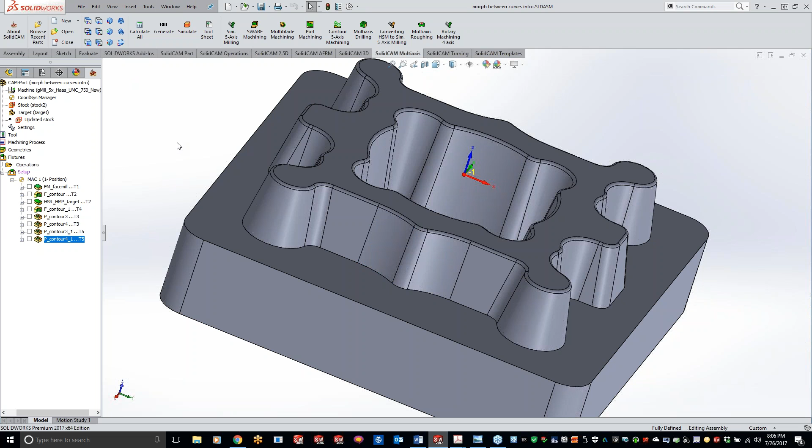Identical to HSS, morph between boundary curves. Next week we're going to cover sort of the same thing, instead of morph between boundary curves it's going to be morph between adjacent surfaces, which gives you a lot of the same results. It's completely up to you guys on what you want to use between morph between boundary curves and adjacent surfaces. I'll show you both, and hopefully that will help you when you come across a part on what you should choose for a toolpath.

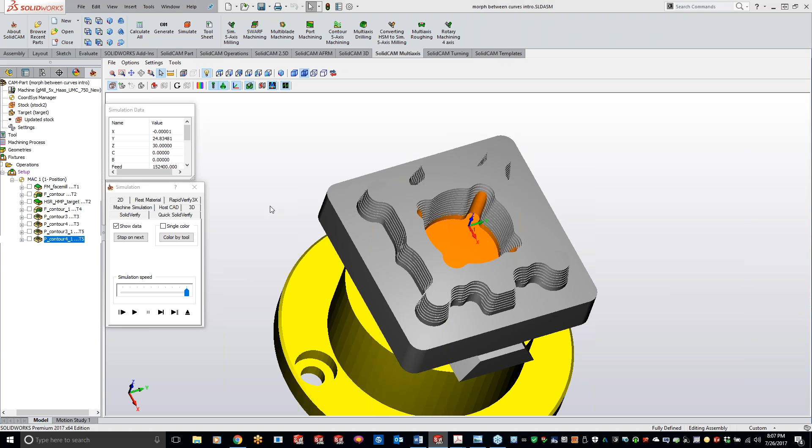If we take a top-down view here, you can see our walls are tapered, tapered on both sides here and the outside. This part is pretty much roughed out right now. If we go do a simulate here, we'll just do a solid verify real quick. So this is kind of what we're looking at right now for what's inside that toolpath. Everything's roughed out. Could use 3D machine on this, but I just roughed it out using some different geometry, changed it up a little bit.

So now we want to do our 5-axis simultaneous in here. I want to keep that cutter basically cutting on the side of the cutter, working its way around, morphing between the top edge and the bottom edge, same thing for the outside. So start up here, and we'll do a simultaneous.

For those of you that are new, we covered a lot of this in the HSS, and like I said, the HSS and the simultaneous 5-axis are identical. You're not going to see anything different. The only thing different here is the tool axis control. If you're just running regular HSS, it's going to look like this. So when we do 5-axis, it just opens up that tab.

So let's start at the top and we'll work our way down. Our drive surface that we want to cut is this inside surface area here. So let me just go through and grab all these real quick. Okay, we got all our surfaces selected.

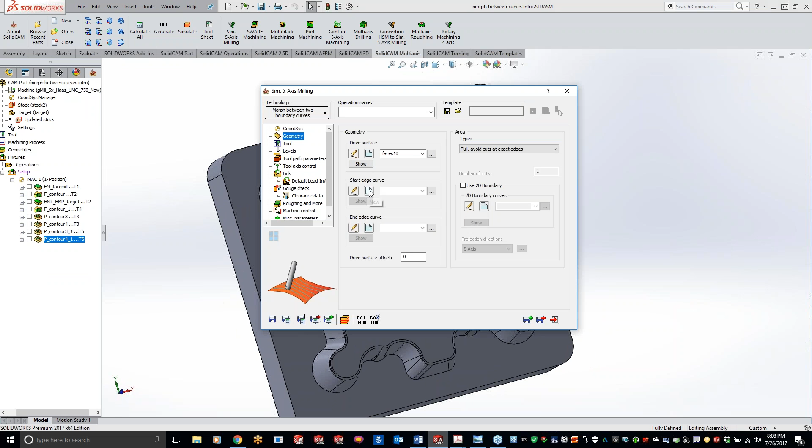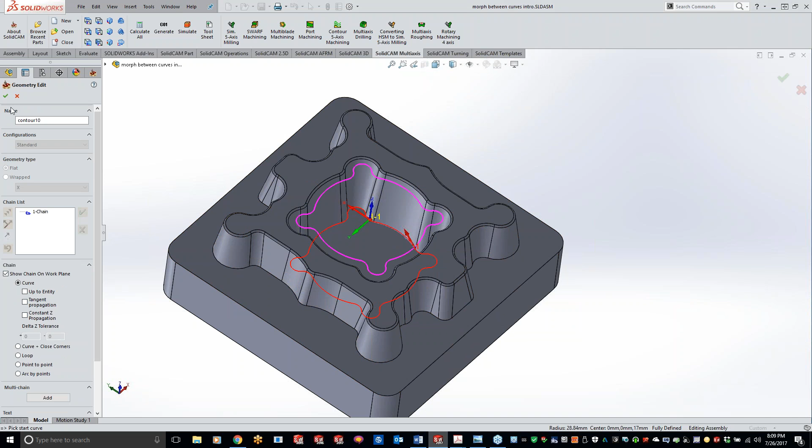Now at my start curve, I want to start at the top and work my way down to the bottom. So I'll chain that, and I'll just do the constant Z propagation here. It's not taking it, so we'll just go around here real quick. There we go. And we'll go ahead and grab our end edge curve. So where do we want the toolpath to end up at? So now we told it we want it to start up here and work our way down to the bottom.

So for this one, we'll do kind of a semi-finish, so we'll just do a 0.2 millimeter offset for right now. Let's go ahead and grab a tool, and we'll start off with an 8 millimeter. Levels, I'm not really concerned about here. Toolpath parameters, I'll set my step over at 3.5 millimeters.

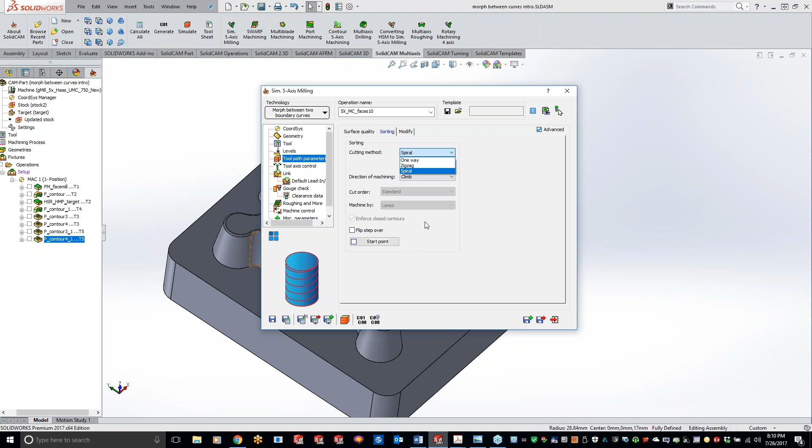Now, the thing I really like to use with morph between boundary curves, especially on a surface like this, is the sorting feature. Instead of attacking this with a zigzag pattern, I'm going to come across this as a spiral, so I can keep that tool completely engaged into that material the entire time. It's not going one way and then stopping, coming back around, or doing a single one-way pass where it goes around and then comes down, goes around. So you get a lot smoother on your machine, keeping that tool in the cut the entire time. Just personal preference, but...

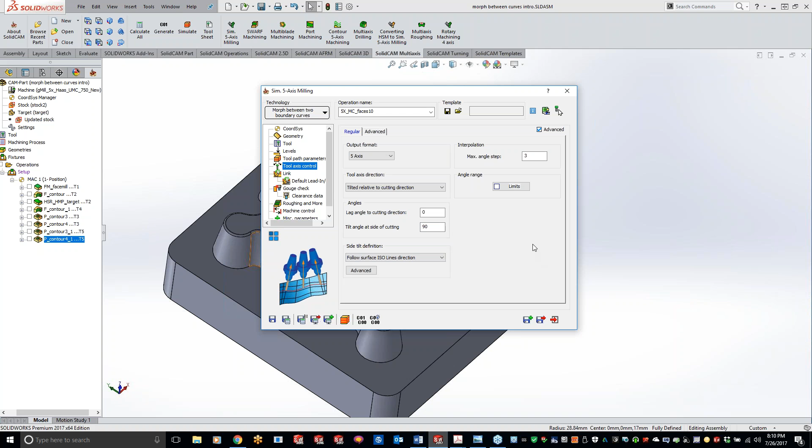Okay, so we'll leave it tilted relative to cutting direction, but like I said, I want to work on the side of the end mill, not really the nose of the end mill. So I'm going to put this at 90 degrees, and then what I'm going to do is just follow the ISO lines. So let's take a save and calculate real quick, see what we got for toolpath.

And we're looking real good here. We may be going just a little bit deep, so as a sanity check, I'm going to turn my gouge check on and do the floor here to make sure I'm not going into the floor, and I'm just going to do trim and relink.

Oh, now we're getting some jump up, so easy enough. Let's go ahead and clean that up a little bit. If we go to our links, we'll just do follow surface.

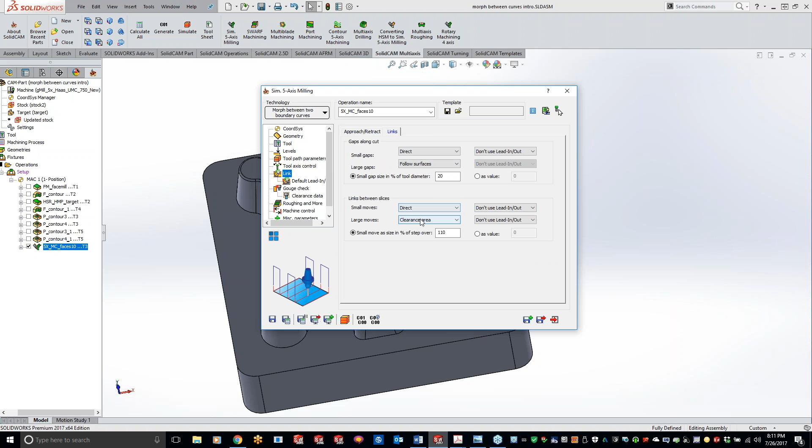There we go. We're getting a nice smooth cut, working all the way from the top, working our way down to the bottom here. So if we go ahead and play this through here, we can play it through in SolidVerify. I'm not seeing much tool action going on in here to get a good example

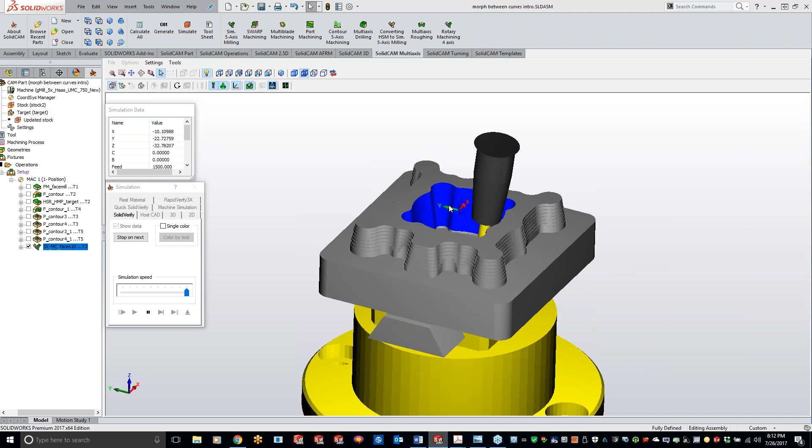of what the trunnion's doing. It'll see a little bit better on the machine sim. So let's just go ahead and run it in machine sim real quick.

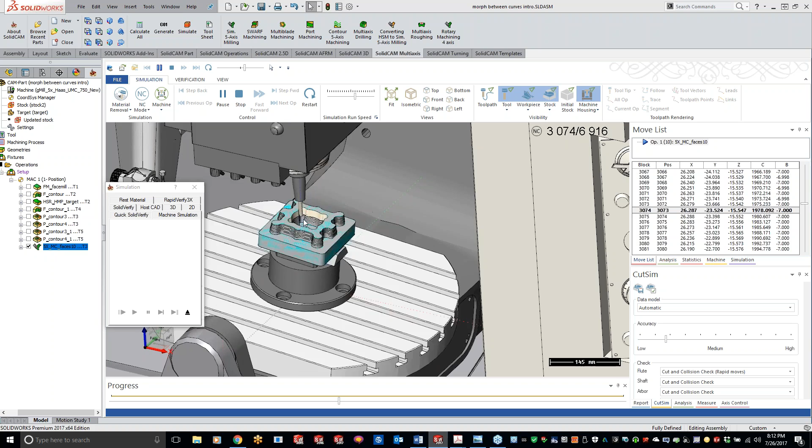So you can see it's following those ISO lines, working away around the tool. I'll speed it up here a little bit, doing that nice corkscrew, doing that step down of 3.5 millimeters here, and just working its way down.

If I zoom out of the machine for you guys a little bit. So pretty easy. Let me get down to the floor here, and we're good.

Okay, so let's go ahead and exit out of here. Now, I want to use that same cutter on the outside. Basically, I want to do the exact same thing on the outside as what I did here. So what I'm going to do is just do a save and copy.

And if I go to my geometry here, I'm just going to repick my geometry. And for this, so you guys don't have to wait for me to click through all this, let me just... I know I have it in here somewhere. There we go.

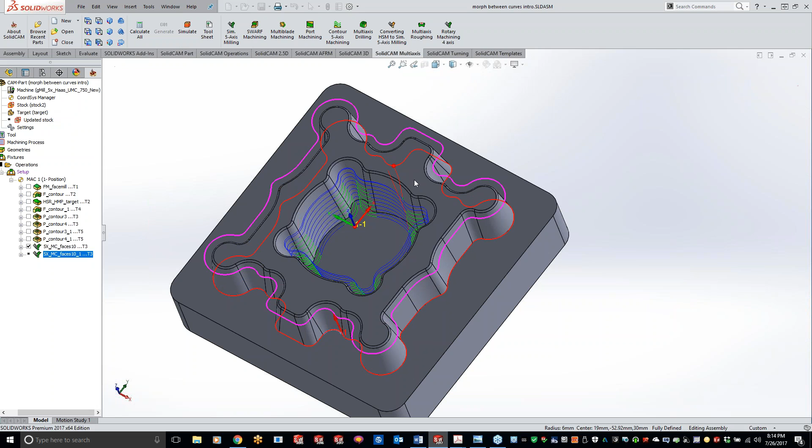And we'll chain our top. Perfect. And let's grab our bottom here. Good to go there. So those are the only things.

Oh, I need to change one other thing here, my gouge check. So I did my gouge check against the floor in here. Since I'm going to be doing the outside now, I'm going to do the gouge check against the surface right here. And we'll just leave everything as it is. Do save and calculate here.

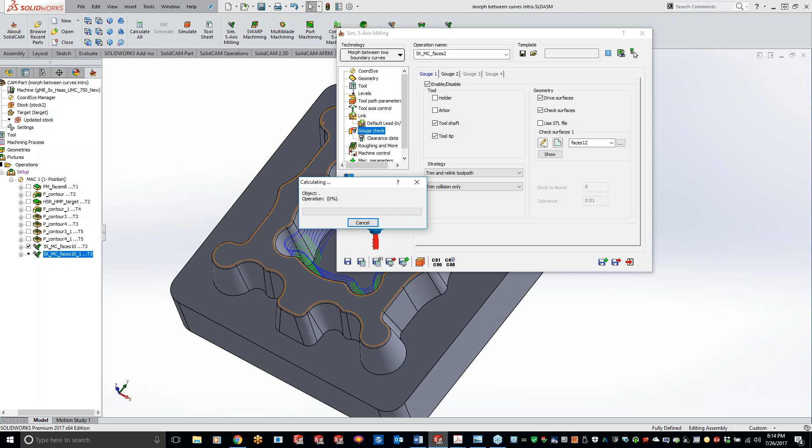There we go. So we're basically doing the exact same thing as what we did before. We're following the ISO lines, using the side of the cutter right here, following that toolpath, going all the way around. If we want to simulate it through here real quick.

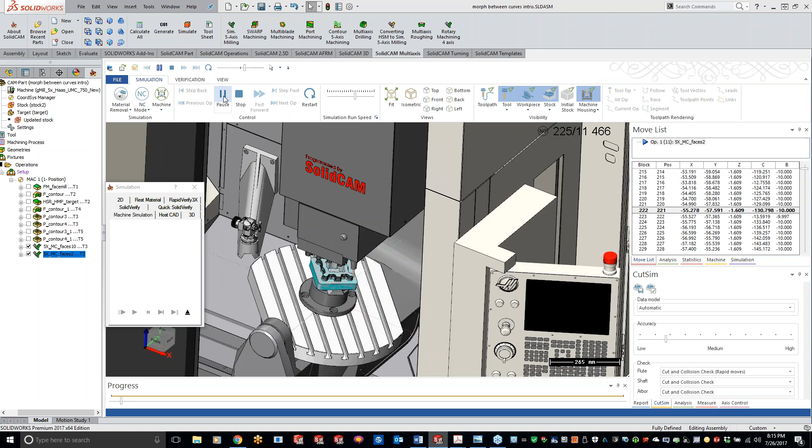And I'll speed this up so we don't have to wait so long here, but you can see we're just working right around the outside of that part. Maybe a little fast for you guys.

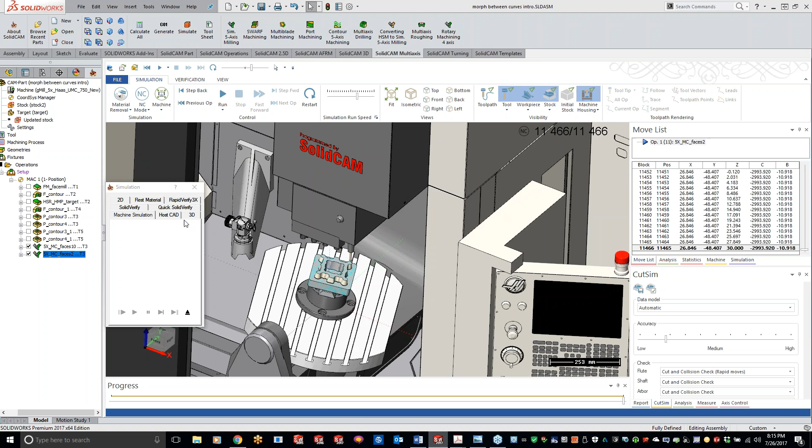And you can see the trunnion just, it's slowly moving there, back and forth as it's going around there. And we're done. So now I left that, what did I leave on there?

0.2 millimeter of a wall offset. So I should still have that, yep, right here.

So now what I want to do is come back and do a finishing pass with a smaller end mill to get all the way down to the floor, all that good stuff. So what I'll do is just do another save and copy here.

And I'll go to my tool, and we'll switch it over to tool number 5 here, kind of my finisher tool there. And then let's go ahead and remove my 0.2. And let's do save and calculate here.

So we're pretty much mirroring that exact toolpath there. Let's go ahead and verify this in SolidVerify. And I want to see if this happens on this particular one here. We might have to go to exact edges.

For that first tool, it really didn't matter to me because if it got close enough to the floor, that was good enough. But once it gets done preparing the machine sim here, I can switch over.

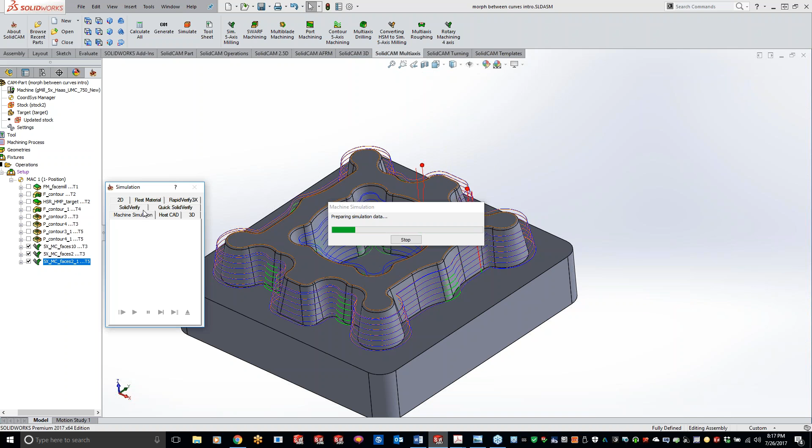Now in my settings, I have it set up so it remembers the last simulation I'd done. You guys can set it up so it will automatically go back to Host CAD. So just in case you want to check a quick toolpath, you don't have to wait for your machine sim to come in, and that's what I probably should have loaded up for you guys here.

All right, so we'll go ahead and dance around this outside of the part here.

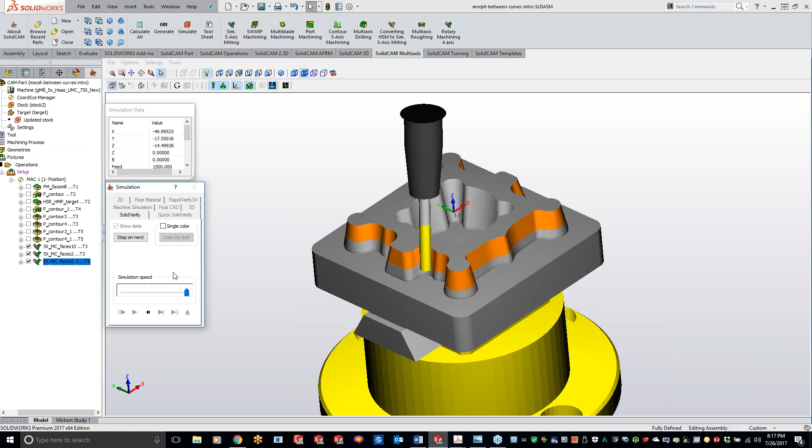So you can kind of see in here, we still got a little bit of material still on the bottom. So what I'm going to do is, and we talked about this with HSS, but I'm going to do it at the exact edges here.

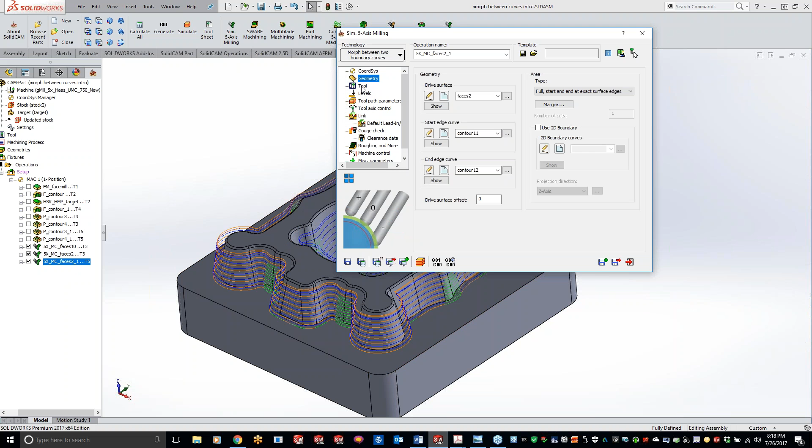And that should get our tool path pushed down. Actually, one other thing here is, since we're doing a finishing toolpath, let's just increase this just a little bit here.

So now, if I get in here, you can see where my blue line is right here. That was kind of my roughing pass. And now my finishing is getting a little bit farther down here, so we're getting right to the exact edges there. So if we play this through here...

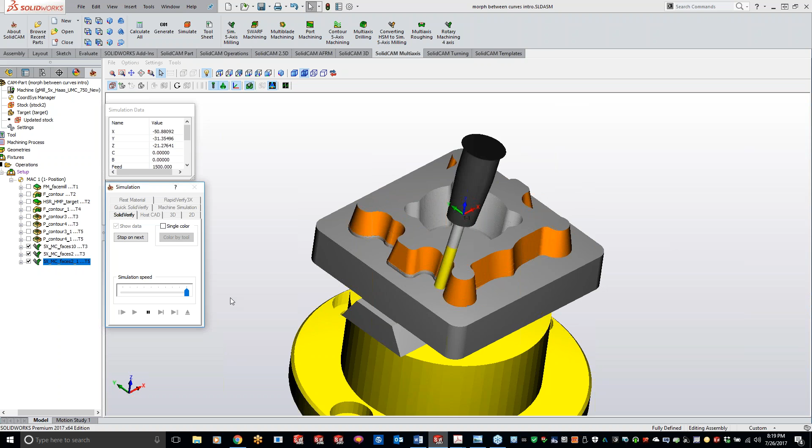There we go. Now we're getting right down to the floor, what we're looking for there. So keep an eye on that too. Sometimes we have to turn that on to get down to that exact surface.

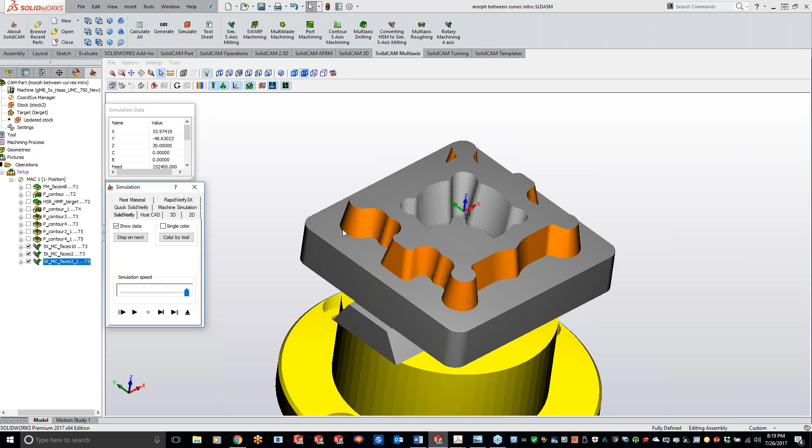That's just since we're working on the actual surface of the model. When two surfaces come together, we can sometimes have just the smallest little gap. So we're telling it to go right down to the exact edge of that surface there. So we got the outside finish.

So let's go ahead, let me turn off these. Let's go ahead and do a finishing on the inside here. So I'll just do save and copy here.

And I'm going to exit out and bring this down to the bottom of the list so I can keep my tools together here. And let's switch this to tool number 5 also.

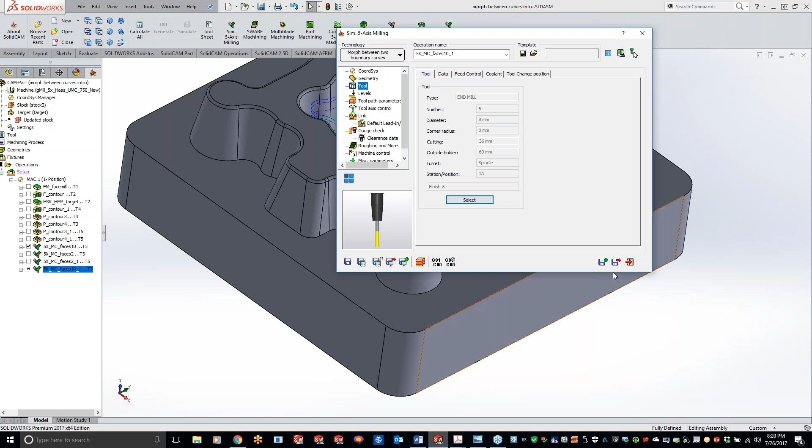And if we go to geometry, let's move our offset there and put this at, okay, at 4.4. And I think that's everything. Well, let's just do 5. And we should be good.

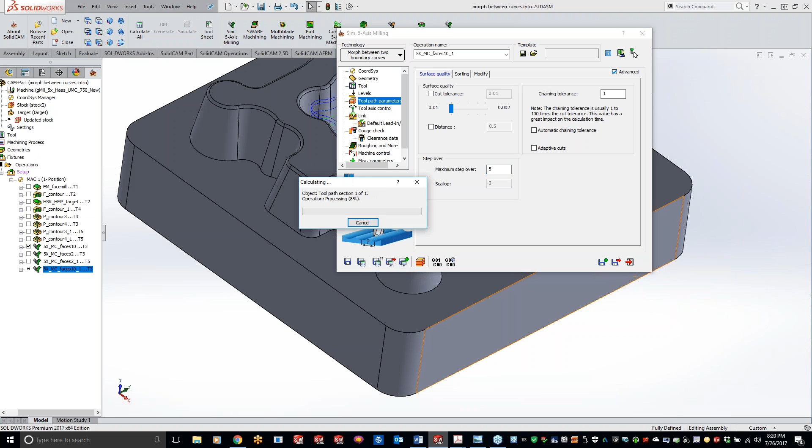Let's take a peek and see what this toolpath looks like. So we're getting down to the floor here. Let's go ahead and play this through in simulation.

And since I started that one and then I moved it down, it has to resynchronize everything. So anytime you guys move stuff around in here, which you definitely have at her, you can copy paste. It will need to resync up with the SolidVerify so it can make sure we're not cutting any remaining stock that's left over.

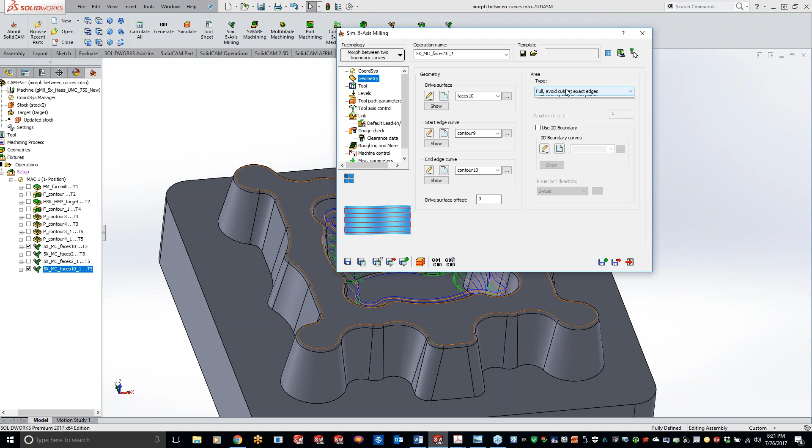And we're still not getting to the, oh, forgot geometry, exact edges. Scott, you forgot to remind me on that one. I'm just kidding, Scott. Yeah, no problem.

All right, so now let's try it here.

All right, and I do have a question for you when you have a second, Kev. Yeah.

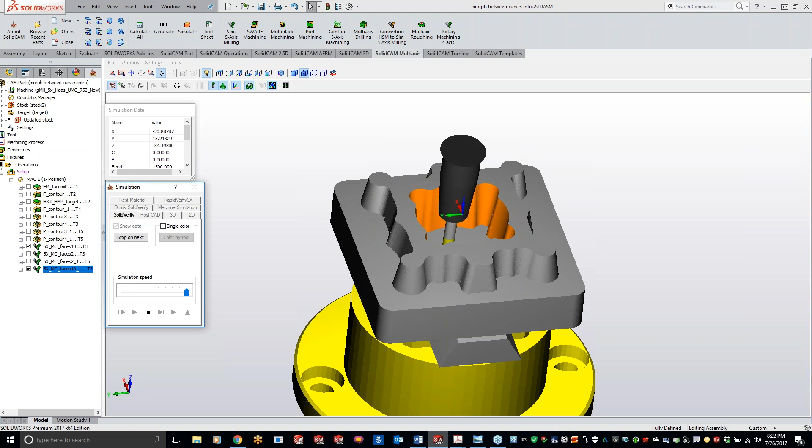Question here is, how is the tilting and rotation decided for a machine? Is it dependent on the machine kinematics, or is there an option to choose different tilting and rotation?

Yep, right here is, so if we want to do this, this is kind of working on the side of the cutter. Let me see if I can get this so it stays highlighted here. So you can kind of see, I wish I could zoom in on this picture here, but you can see like right now, at 0, it's straight up and down. So since we want to use the side of the cutter, we're going to do 90 degrees, but we can also tilt the cutter.

So with this lag angle here, it will be kind of tilted. Let's see if I can get this to stay over here. Tilted, going this way along the toolpath. I kind of went over this tilt angle quite a bit with that turbine blade.

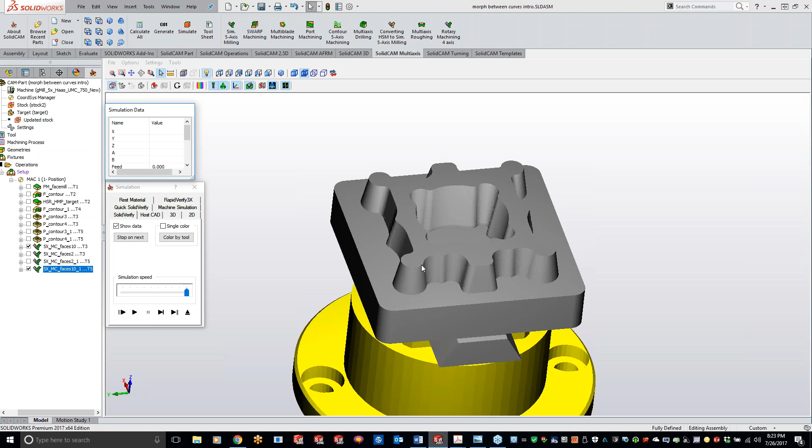So it does depend on how your machine works and the kinematics, Anthony. But the best way to get a good sanity check is coming over to your machine sim. The only reason I say that is because we just kind of see the tool dancing around right here, and we don't really see the trunnion moving, whereas if we go over to our machine sim...

Once we pull it up here, and let's get rid of our housing here.

So now if we play this through, let's slow it down here, you can see a lot more of what's going on. You can see our trunnion moving back and forth here, just to follow those ISO lines. Sometimes you guys might not be able to go off of the ISO lines, it all depends on the surface. Since we're basing all of our toolpath off of the surface, you might need to play around with which one you decide to go with, whether you want to follow ISO lines or some of the other options.

And that's it for this part. Anybody got any other questions on this particular part right here? All right.

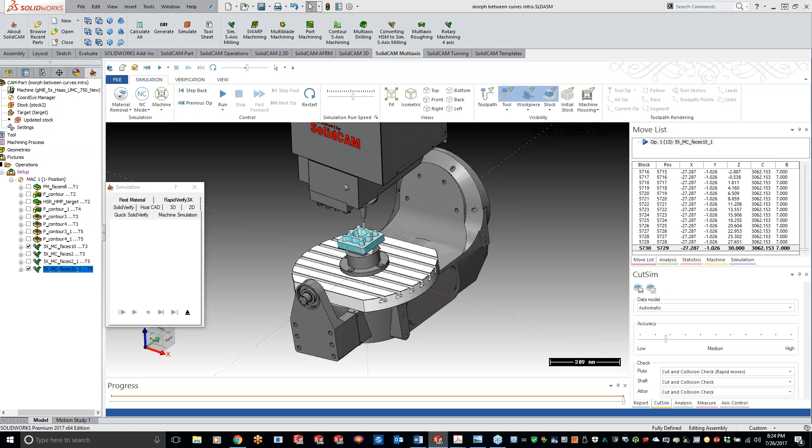Let's go ahead and hop to our next one here. Did everybody fill out that survey when I was doing that part? I'm just kidding.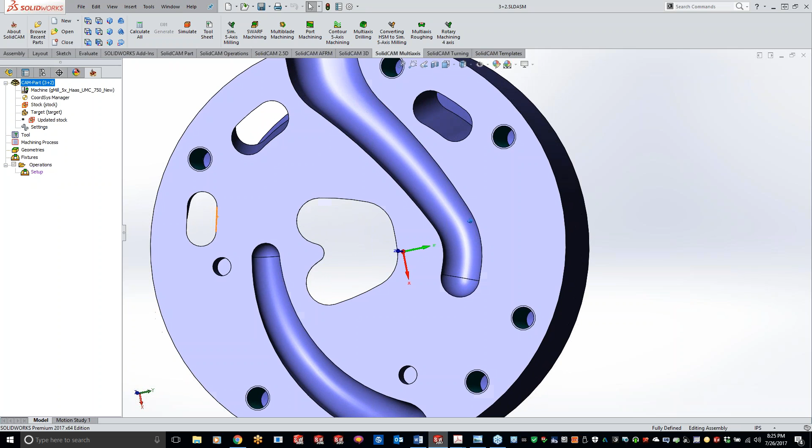Okay, so here is a part, doesn't look too complex, but when you actually get down looking at these pockets right here, you'll notice there's pretty much a little bit of undercutting going on. Got some really weird angles kind of going around this. Feel sorry for the engineer that had to draw this, but it definitely works as a great 5-axis part to show you guys here.

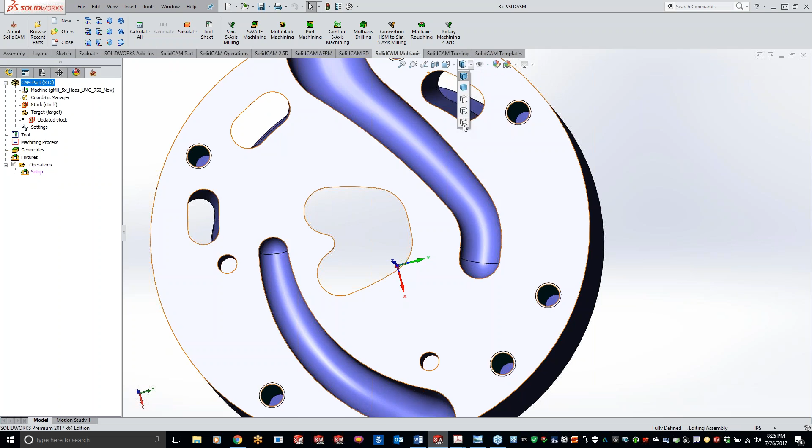So what we'll be doing here is, hopefully you guys can get a good representation. Let's try to do a top-down view here. You can kind of see that bottom is actually wider on this side versus this side, so it's coming in at a compound angle there. The only way to cut this would be 5-axis, obviously.

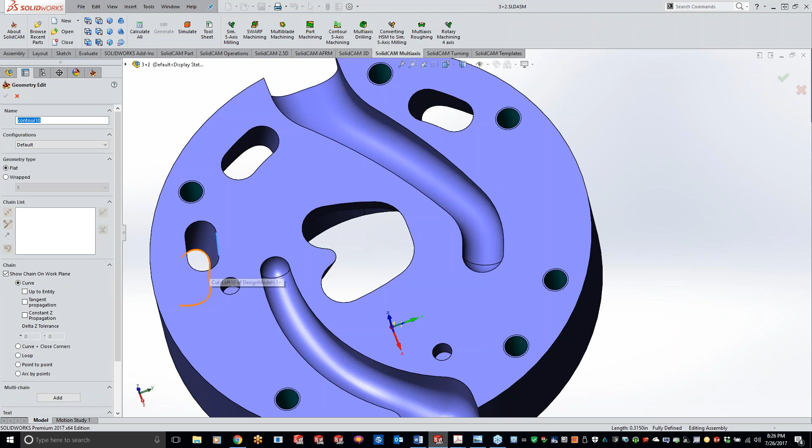So let's go ahead and grab our morph between boundary curves here, and we'll start with this guy. Let's go ahead and grab a tool here, grab our ball end mill. Levels, not going to really worry about because we're not having to worry about rotating around the axes here.

For toolpath parameters, let's just do a 20th step over and switch this over to spiral. Now for our tool axis control, basically going to do the exact same thing as what I did before: tilted relative to cutting condition, working on the side of the cutter. Instead of doing 90 degrees to each cutting position, I'm going to follow the ISO line direction.

Let's just take a peek and see what this gives us here. I think we may have to do some gouging check here, let's just go to gouge check and turn that on real quick. For the gouge check on this one, I'm going to do a tilt tool, and I'll just leave it set to automatic. I don't really need to care about the surfaces right here. So let's do save and calculate.

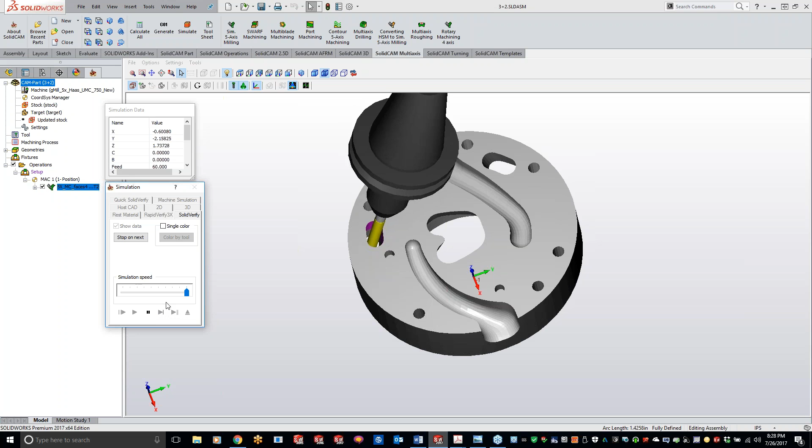We'll do a solid verify for you guys first here, and then yeah, we're not seeing much here. Let me go to general, show every single step, may help out. Getting all that material out that we need in there. And we're looking good there.

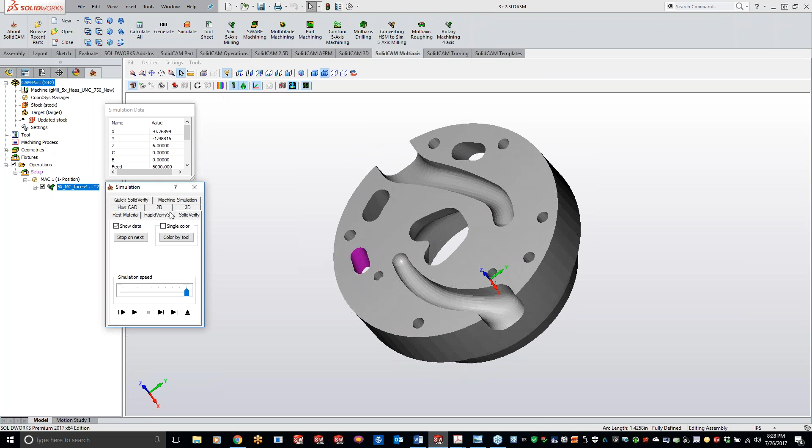If we want, we can throw this on machine sim. Zoom out just a little bit here and slow it down a little bit so you can really see that. I think it's really cool seeing that trunnion rotate around and the 4th axis rotating all simultaneously.

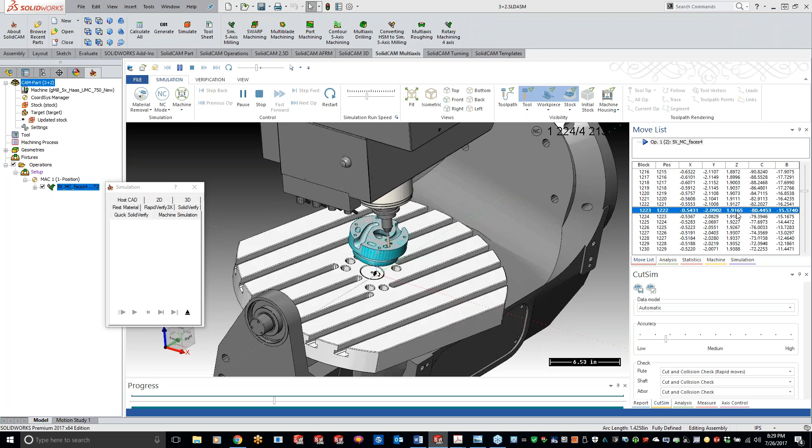Basically all 5 axes are working at the exact same time here. You can kind of see all my movements: my B axis, my C axis, my Z, Y, and X axes just constantly moving. All right, let me speed up a little bit here.

All right, so now we got that one, and I'm just going to do what we did before here. I'm just going to do a save and copy, change up my drive surface here.

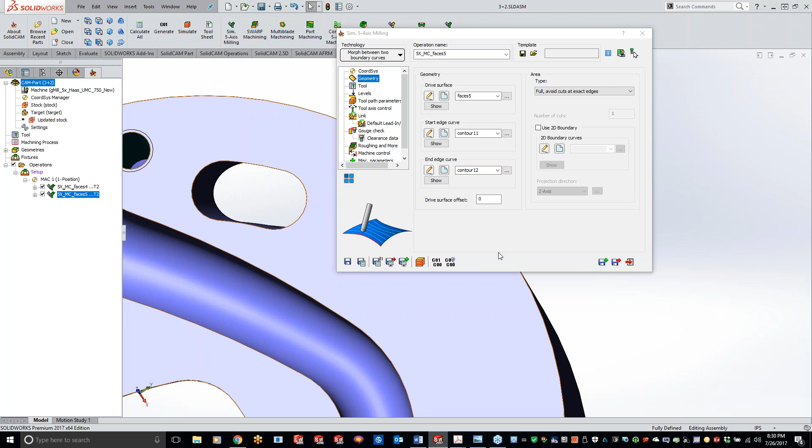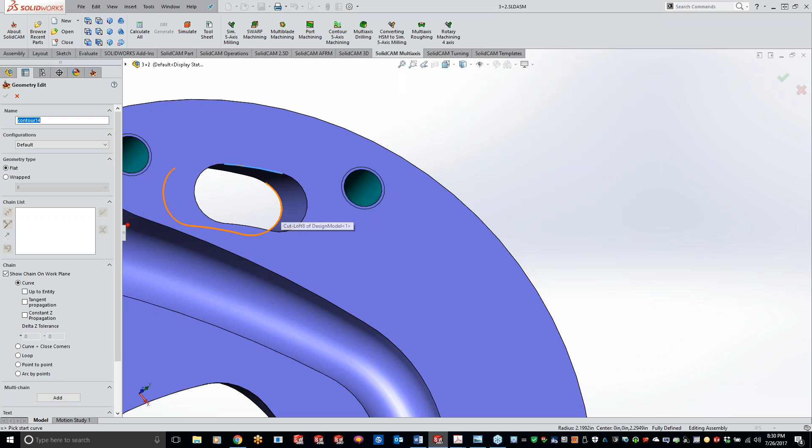Especially since we're doing that spiral, we get a real nice surface inside there. Let's go to this guy right here, save and copy again. Geometry, grab our inside surface there. Start. All right, save and calculate.

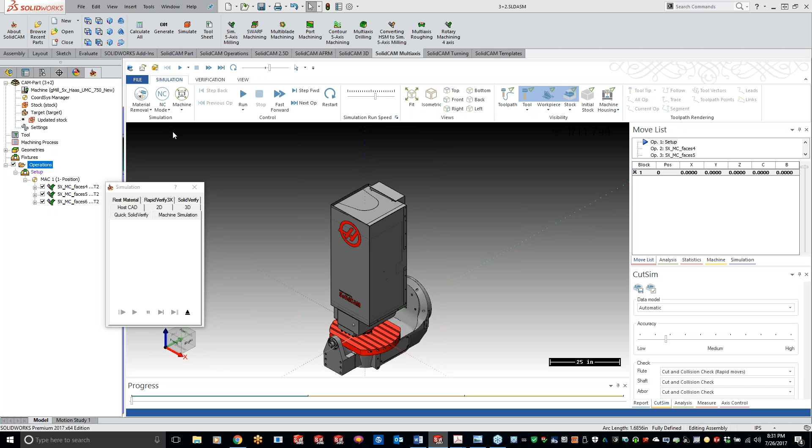All right, so let's play this through and, oh, I want to do solid verify. So working on the one slot there. Going over to our next one here. Try to speed this up a little bit.

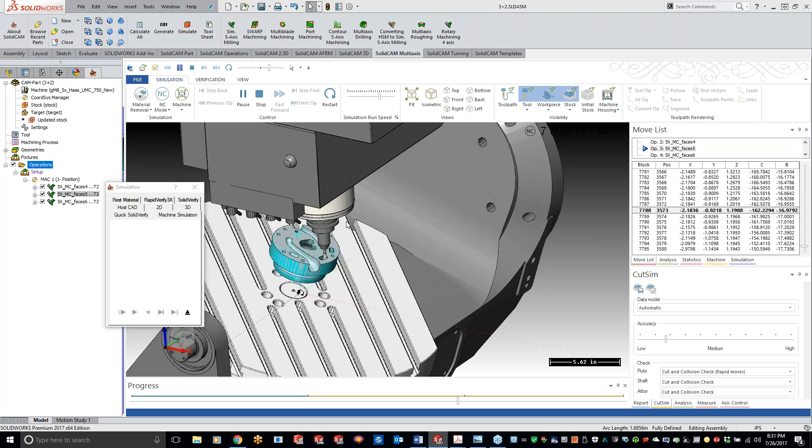Any questions on this part right here? So far, no questions, Kev. All right.

Now, one thing, I'm not sure if some of you guys know this, but as this gets done, if you want to replay an operation, all you have to do is click on what operation you want to replay, and it will replay that operation. That works for anything inside of SolidCAM.

If we get out of here and, let's say we just want to simulate this operation, we'll do solid verify. Let that play through real quick here.

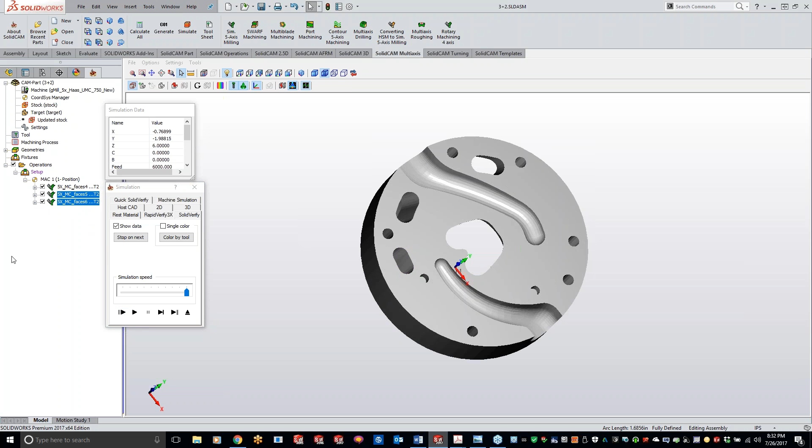But what I'm getting at is if you guys wanted to see other operations instead of having to exit out of the simulation dialog box, all you have to do is click on the operation you want to see, highlight it, and hit the play button. Now, I've never tried this, but if we want to do two at once, looks like you can - just hit the control key and it'll play all the rest of them for you. So if we don't have any questions on that, let's pause this and get on to our next one.

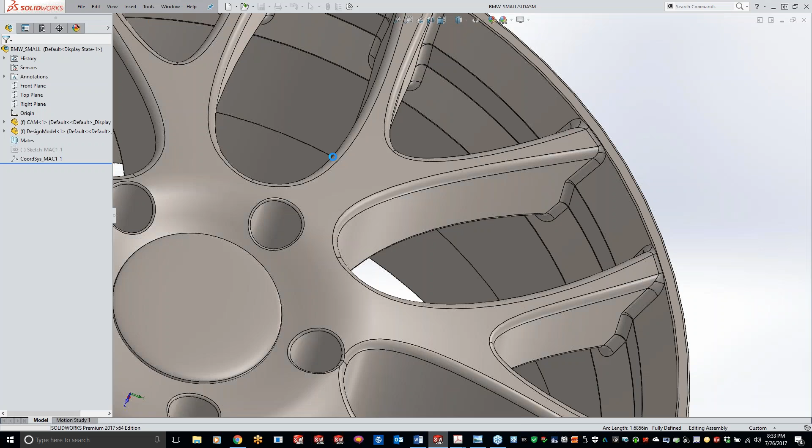I have a BMW rim here. Greg Payton got this one for me, but it's a BMW rim scaled down for a Matchbox car now. This was a 20-inch rim, and I sized it down - what are we at for a diameter here? 4.73, so a little bit bigger than, I guess for an RC car it would work, but just to shrink things down a little bit for you guys.

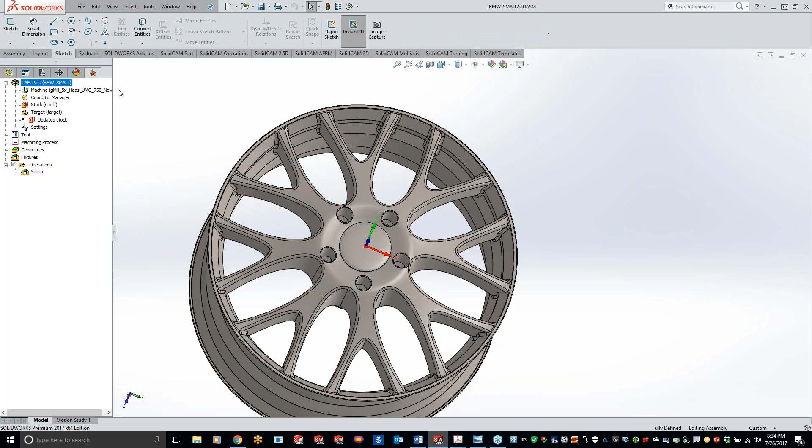So what I want to do on this one is a morph between boundary curves, getting all these chamfers going around here. Let me get to my multi-axis. So we're going to use our morph between boundary curves.

Let's grab this guy right here, and our start looks good.

All right, let's grab a cutter here - a small little guy. Level is not going to really matter here. Step over, since we're running on a smaller part here, I am going to bring this down. Let's just try 10 thou for right now.

Now with this one, what I want to do is keep it fixed at one angle, so I'm going to use tilted by fixed angle here - sorry, grabbed the wrong one - tilt axis by fixed angle. I want to work at 30 degrees on that cutter. We'll leave the rotary at 0.

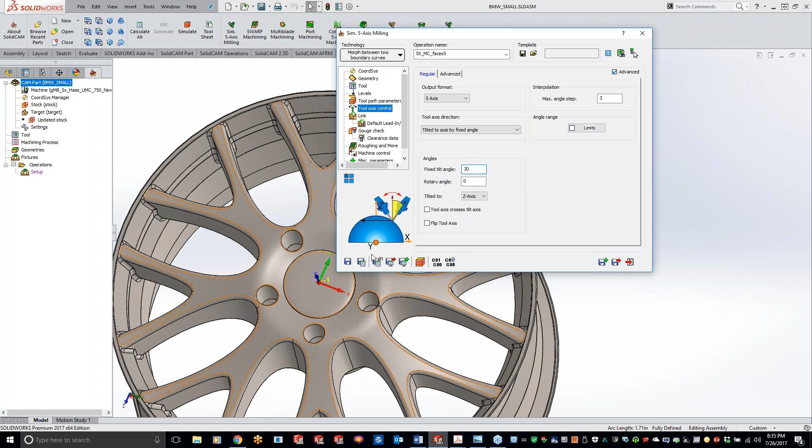Let's just do save and calculate here, see what we have for toolpath. So it looks like we have some linking going on here, so let's clean that up. If we go to links, I'll just do follow surface. There we go - so we're coming in, starting at the top, working our way around, going back and forth using the zigzag.

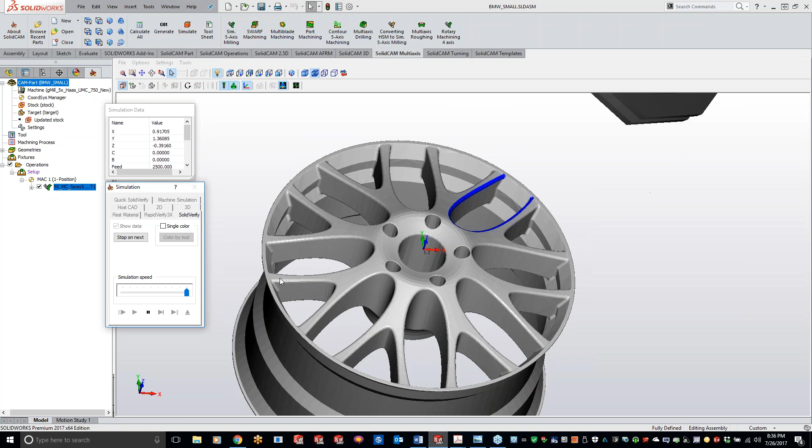That should get us - let's just do a simulation here. And it looks like we are gouging in there. So let me just do a gouge check real quick, and we'll do tilt tool automatic, and looks like I was gouging into this surface right here.

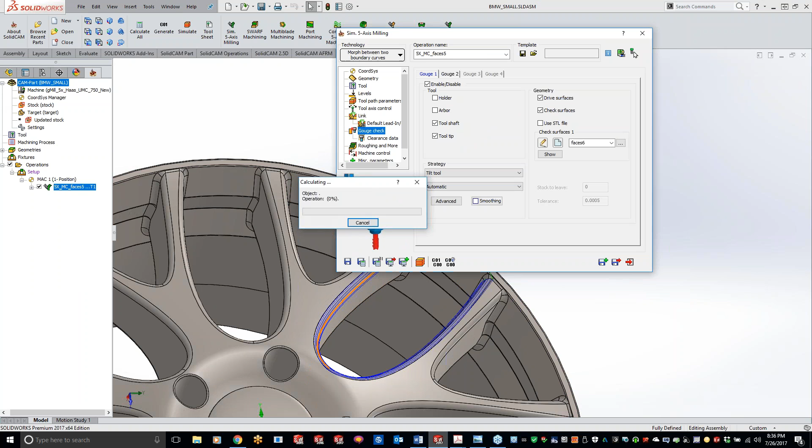And let's do a solid verify - slow it down a little bit here. So that cutter is staying at 30 degrees in contact with that the entire time, just going back and forth, rotating around.

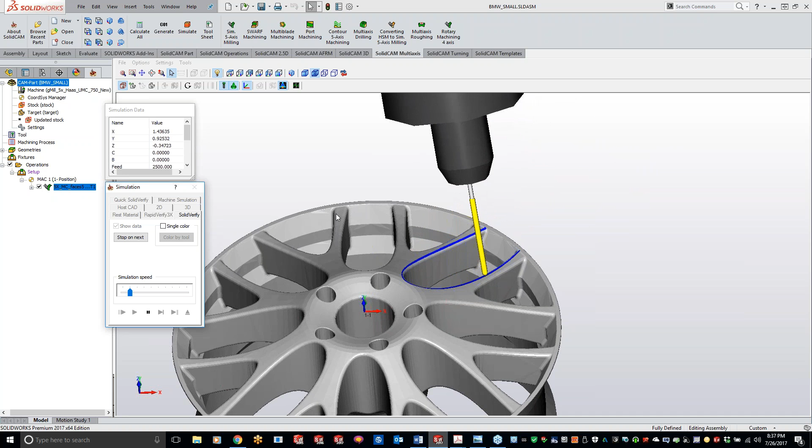Now we have all these other spokes right here, so what we're going to do is basically a mirror - or a translate, rotate. If I go to the roughing and more option right here, I'm going to turn this on. Now I have 8 of these surfaces that I want to cut, so I can just put 8 in here, and instead of 90, we're going to be at 45. Hit OK, save and calculate. So now we've got all our spokes all done.

So if we want, we can show this on Machine Sim here.

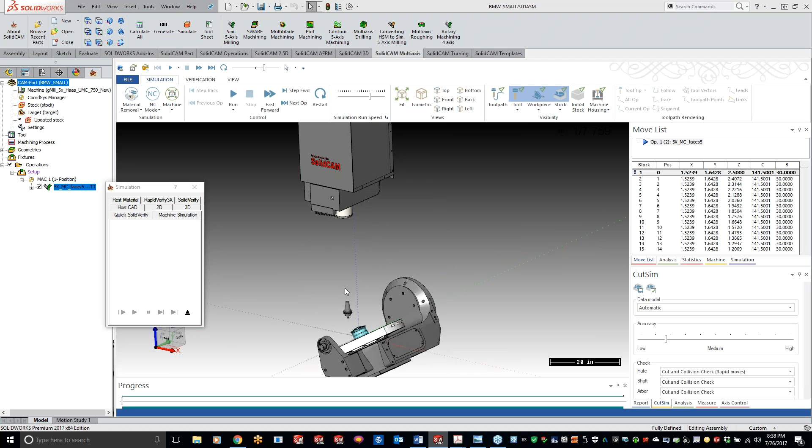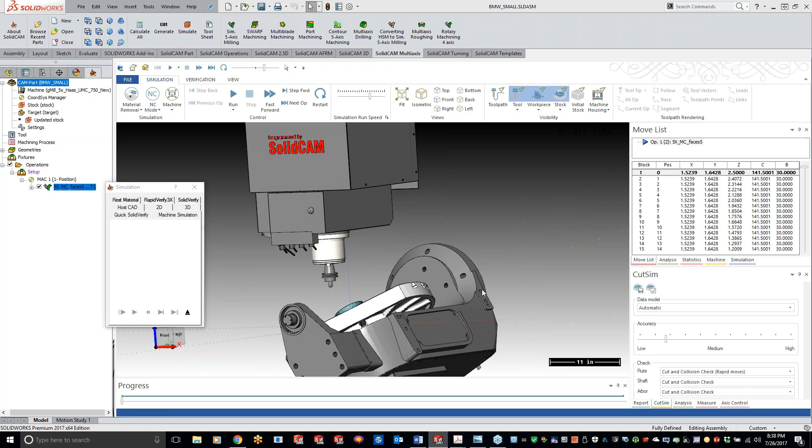That tool - remember when that did that to me last time, guys, when that tool was hanging way out? That's in my tool right here. For some reason this number gets thrown way off here. Oh, it's not - let me show you. Oh, looks like I'm still sitting too far out. Sorry about this, guys, give me one second here. Let's try 4 inches.

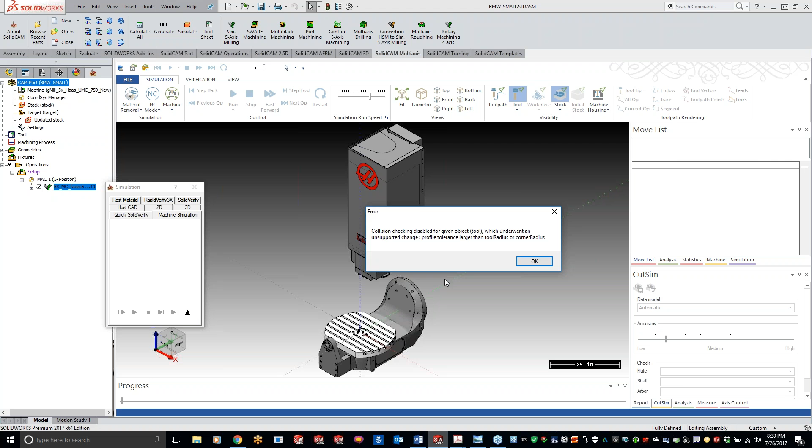There we go, okay, so let's slow this down a little bit here. And you can see our rotary is staying right at that 30 degrees. So we're just locking out that 5th trunnion table at 30 degrees, so it stays right there and works around the part.

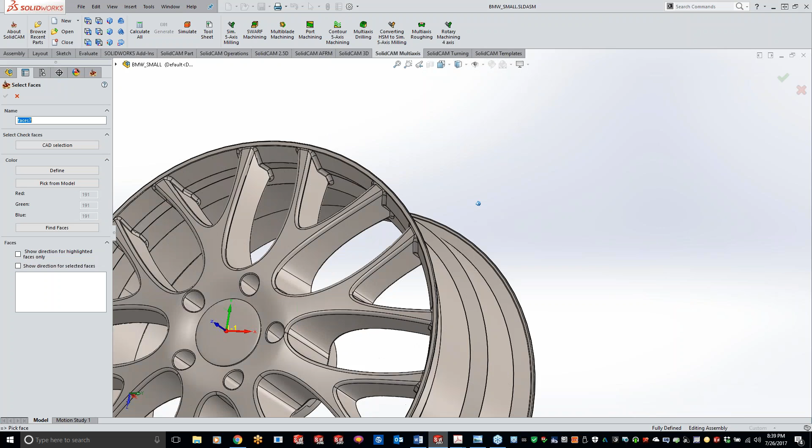So now we can do this exact same thing - I'm just going to do a save and copy here, and we'll switch up our geometry. Grab this guy and this guy. Start will be here.

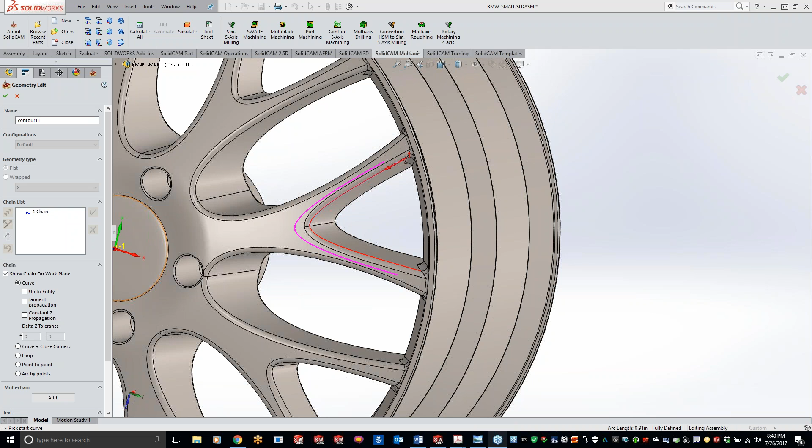Is there anybody in here that picks a chain and it automatically wants to wrap around? Is anyone getting that currently, and is it driving you nuts? Because there is a setting for that, and I just want to make sure nobody is silently suffering. I don't see anybody popping up, so okay.

Let's just do save and calculate here. And now we have a full 5-axis toolpath cleaning up that entire rim radius, going all the way around the entire rim. So pretty easy to use, especially using that translate function right there. We're not having to do all these different things separately, real nice to use.

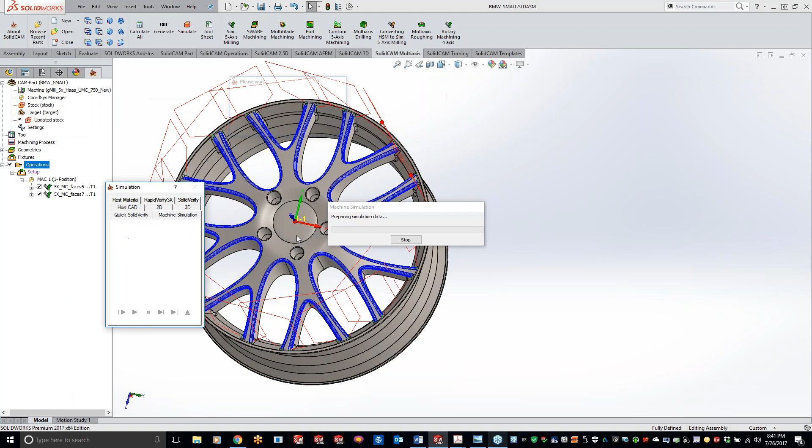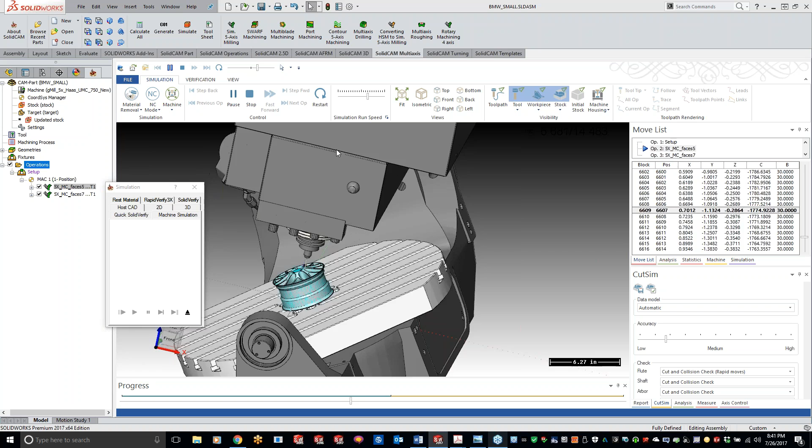If we go ahead and simulate this through here, machine sim. I have it blazing fast here, but there we go. So we got that rim, and like I said, it's the little RC car version of the BMW. Any questions on this particular part, guys?

Everybody's so quiet tonight. Yeah. Everybody's on vacation mode like I was last week. Silent protest. Yep.

All right, so I got one last part here I want to show you guys, and I didn't know if I would get time to program it live for you guys, so I had it programmed ahead of time. Let me just do browse recent parts here. This guy. Get everything loaded up here.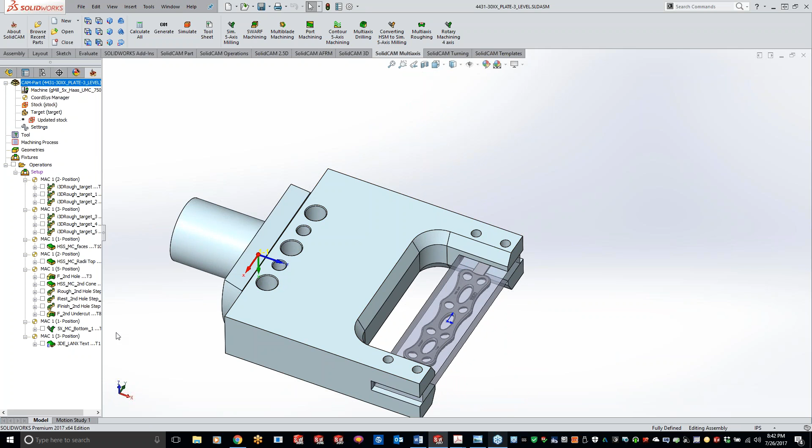Okay, so this part right here. Now the reason for the 5-axis on this one, if we go to Mac 1 here, you can kind of see, we wanted to use the side of the cutter to get in there and go back and forth, basically hitting all this surface right here. So what we did here, if I show you the geometry, is basically just select these faces. It's only going to work on those specific faces.

So instead of having to come through and fill in those holes with a surface or anything like that, I just went to the link, so I'll get that here. The start edge is kind of the bottom of the geometry, and I can have this reversed if I wanted to start at the bottom and work its way down. Then the end curve is the exact opposite side.

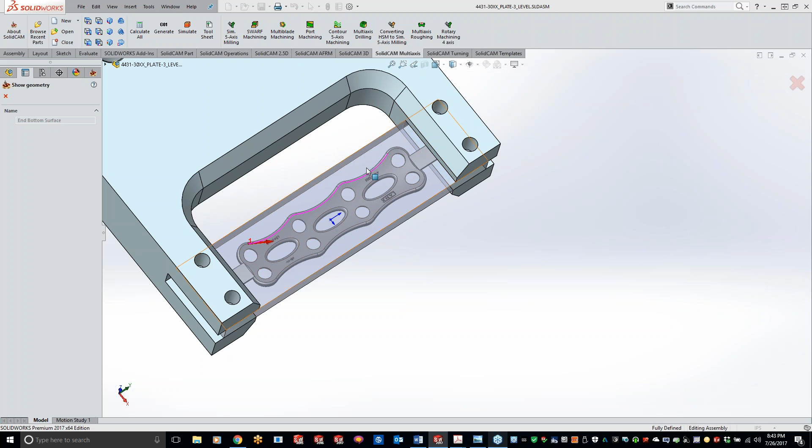Now you guys don't need to have a chain that fully wraps around. What we could also do, I guess, if we wanted to start at the center and work our way out, we could pick this ellipse right here and start in the center working out. But basically I want to start on this side, work its way across doing a zigzag pattern, meeting up to this side over here.

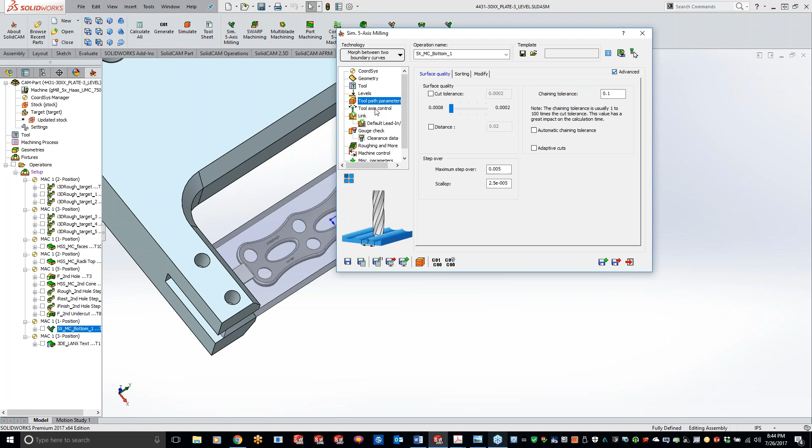Using a 1/4-inch ball end mill here. Levels, like I said, not really going to worry about. And doing a 5-thousandths step over here. Now, if we go to the links right here, is what I was talking about.

So it's set up as the follow surface, so basically it's just going to skip over that like it was filled in automatically. If I turn on the toolpath, you'll see it here, all the green. It's kind of skipping over those hole areas right there, so it's like it didn't even exist.

If I can get a good view of what's going on there, just staying along the same feed rate, just skipping right over those. So, now this one we did by fixed angle too.

What I want to do is keep it at 30 degrees to get clearance in there for that cutter. Then the gouge check is just against the drive surface. I think I had to extend the surface—no, didn't have to do any extensions here. So we did right to the surface edge.

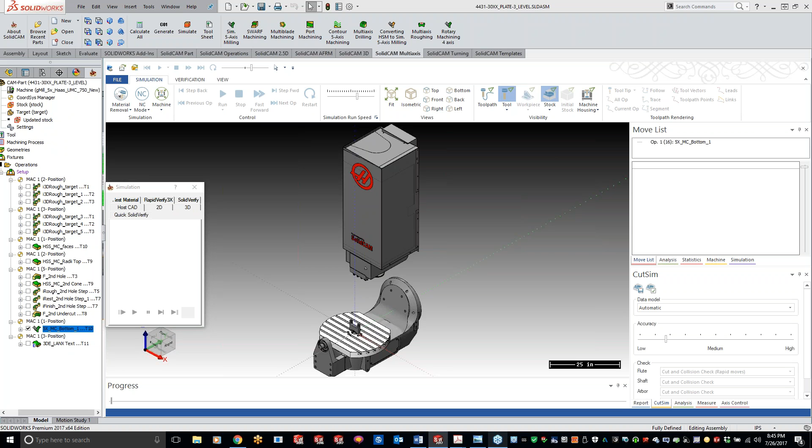So if we go ahead and play this through here, let's just do a machine sim here. Give it a second while it's calculating, preparing everything here. Oh, that tool—let me go fix that tool real quick here.

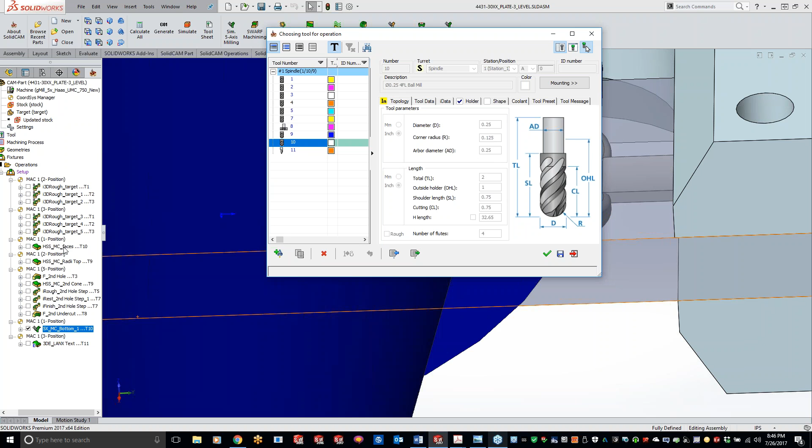Try to have this all set up for you guys, but every once in a while... and I'm using that, yeah, I'm using that tool. So this is kind of completely off the subject of 5-axis, but if you guys go and open up your tool and everything's grayed out, that means you're using that tool in another operation, basically. So for that one, I'm just going to say no, don't save, and exit out of here.

If I go to open up my tools right here and go to my tool number 10, do 4 inches, save and exit. And we'll just calculate this guy real quick.

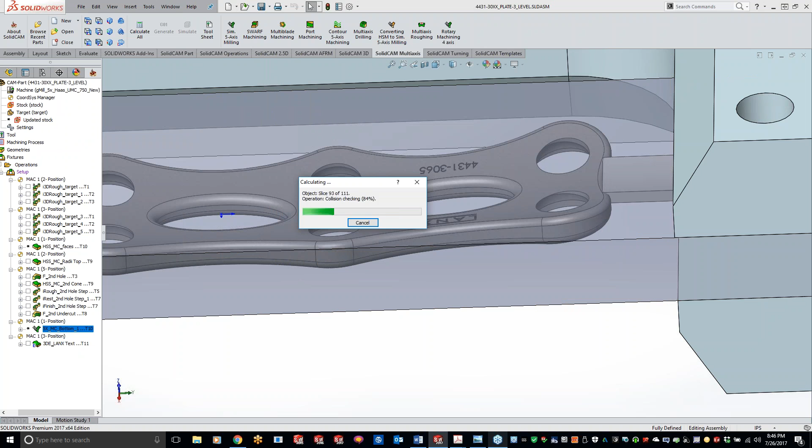And I'll have to calculate this HSS operation real quick also. Okay, so let's simulate this.

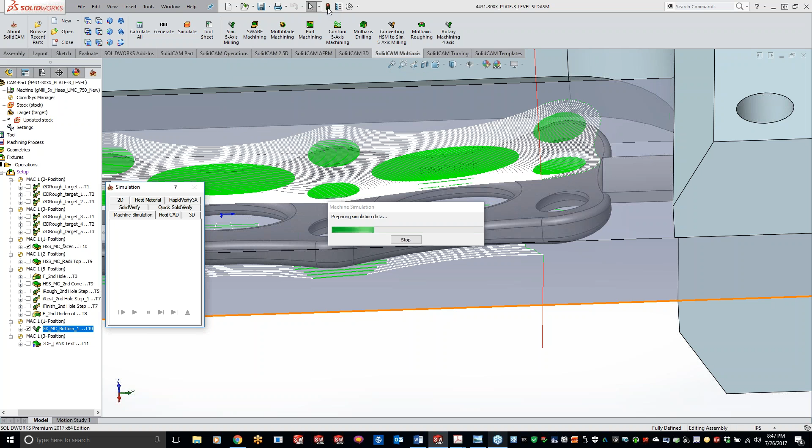For those of you that are new, if you see a little star by an operation, that just means it needs to be calculated. If you get a stoplight, that means it needs to be resynchronized and calculated—something's gotten out of sync and lost its associativity to the model. If that happens, just right click and instead of calculate, do a synchronize and calculate, and it will synchronize everything. If you're changing models, doing the change model reference, and your settings aren't set to automatic, you'll every once in a while get stoplights for your stock and target. Just a quick heads up for you guys.

All right, so let's slow this down a little bit. Like I said, locked at that 30-degree angle and just getting in there with that tool. We're not using the tip of the cutter here—we could use the bottom of that ball, but to get a nicer finish, we're using the side of the ball, not working right on the bottom tip.

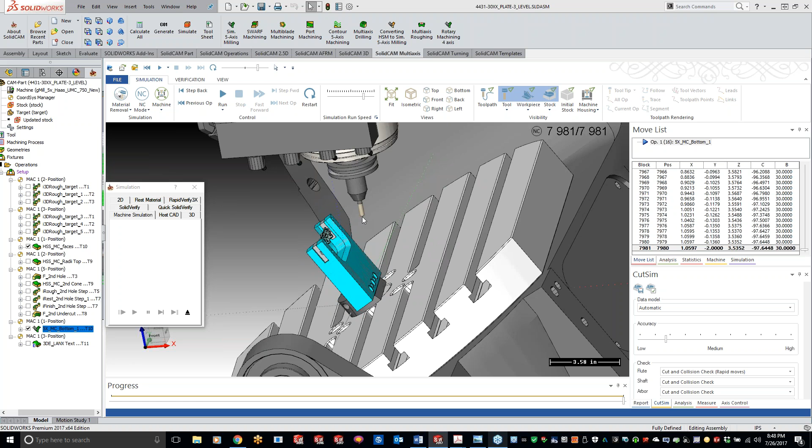And she's done. I think if I remember right, this is actually an implant, for a bone graft or something like that.

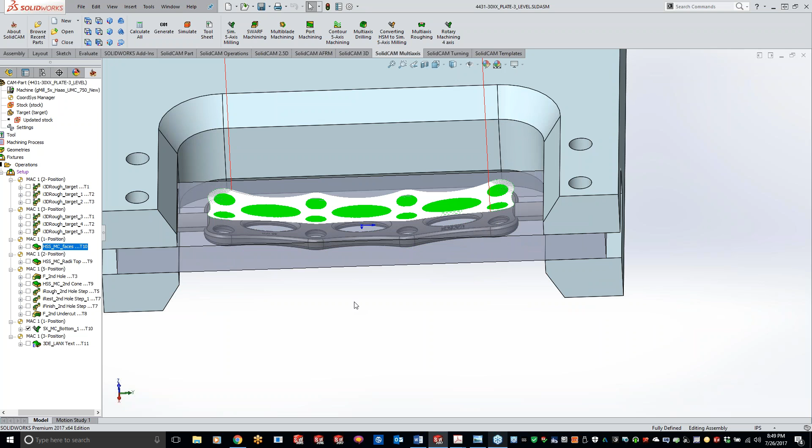Any questions, guys? That's basically about all I have for tonight for the morph between boundary curves. Any concerns? Anything else you guys would like to see in there? Did I put everybody to sleep?